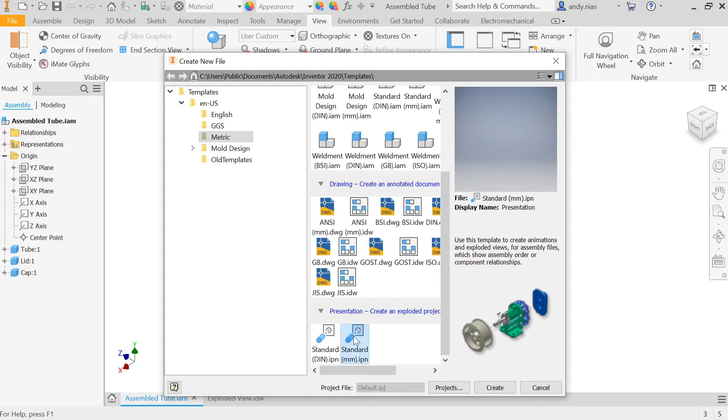So the way we do that in Inventor is we have to create a new file, and it's right down the bottom, it's called a presentation. So you can select that and make sure you select the standard millimeter one. And into there we've got to insert our part, or the object that we're actually going to be working on.

So if you navigate to wherever it is that you've got your parts saved, bear with me one second. Okay, there we go.

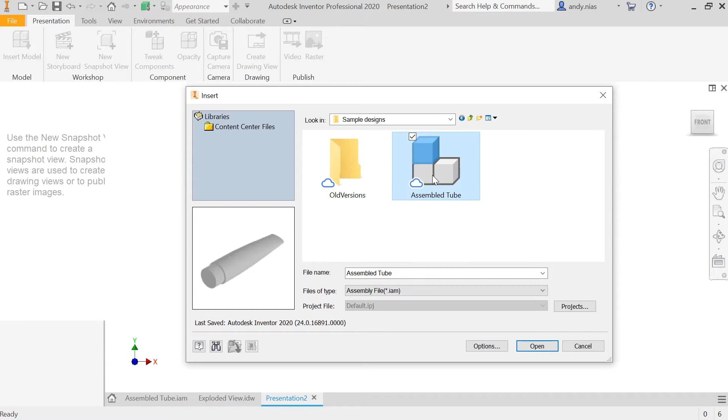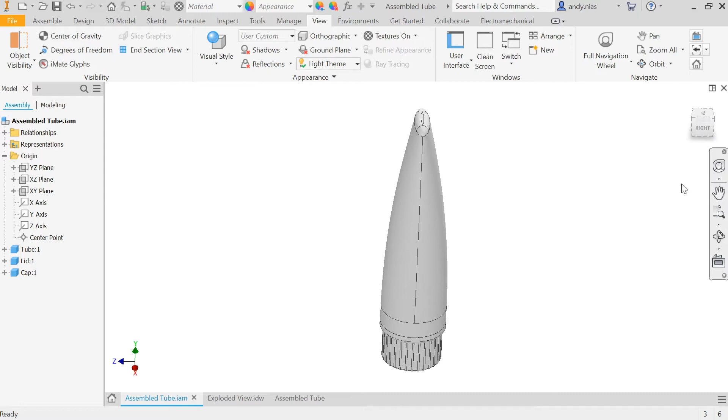It's going to drop that in, and we've got the space. Now just think for a minute on this. Make sure that your orientation of your model in your assembly is the right way up. So I want my model so that it sits on its lid, so the top is facing up and the bottom lid is on the ground. That's the way it appears in your presentation. So think about how you're arranging your part and your model in the space.

Once you've got it in, it's very simple to move the components about. It's called tweak - we're going to tweak components. I'm going to leave the lid at the bottom, and I'm going to move the other two components.

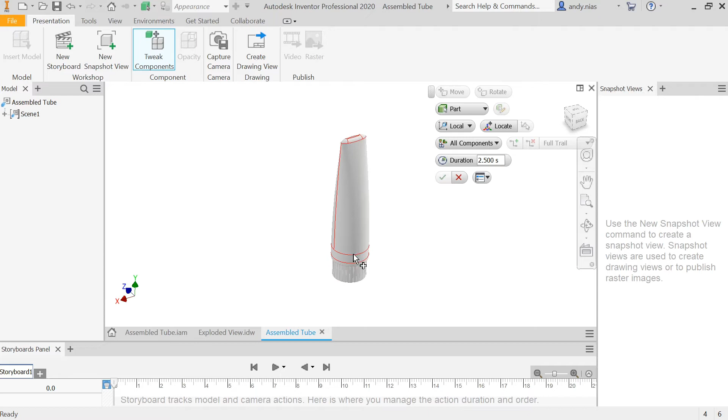So if I just select one, you get a blue line. You can hold shift to select more than one. So I'm going to move both these together, going up. If I just drag them in that direction, they become about 50. I think I'm going to go for... let me change my view slightly. So you can either just drag it or you can put numbers in, and then you can press enter.

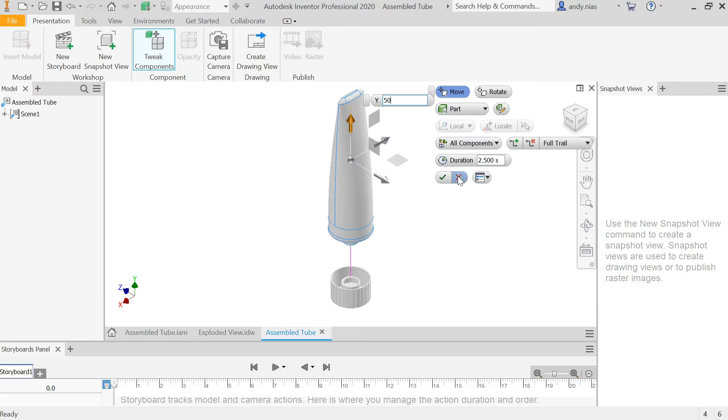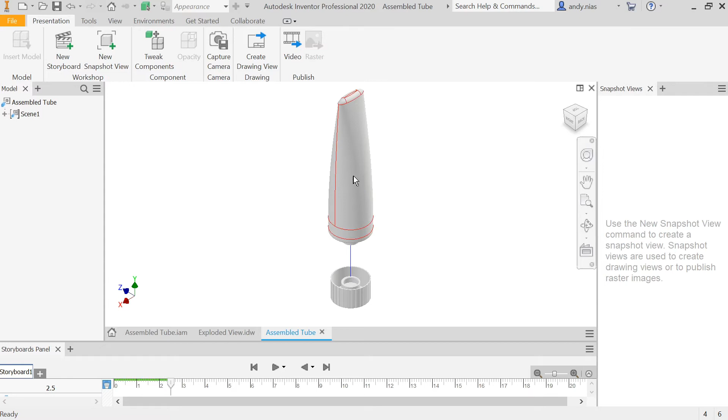When you explode parts, you want to explode them along sensible lines. So obviously this one is all just going to pop along one axis in a straight line. If you've got other bits that fit on, maybe bolts or other parts, think about the direction that they would explode in, and when they would explode - it may be that you need to lift some parts up altogether before this one comes sideways.

So I'm going to move my next one as well. I'm just going to select that one, and move them up - but equally you can move them in other directions depending on how your parts are exploding, so just think about how you're going to do that. I just need to go back to where I was. Tweak that one up 50 again.

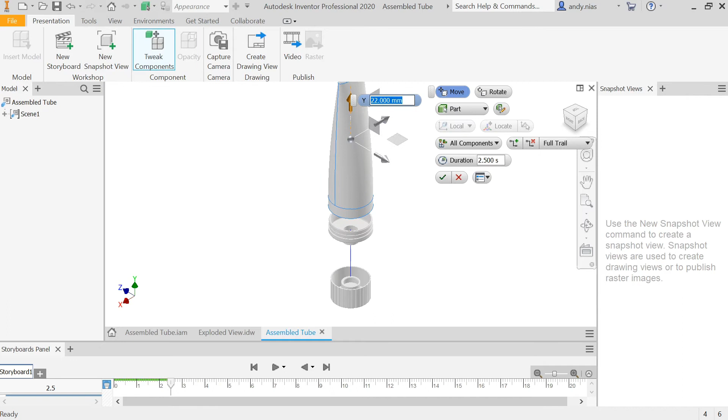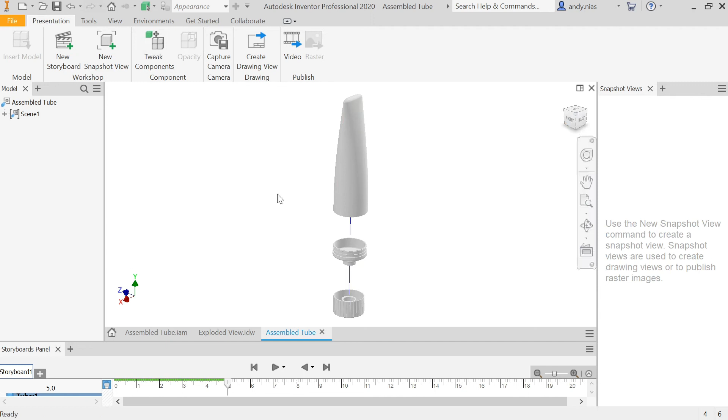Now, any rule when it comes to exploded views is that the parts must not overlap. So make sure, if you're doing an isometric view like this one, when you view it from the corner there's no overlapping parts. If you're viewing it maybe more like this, I think that looks fine, but actually when you come back to view it in your drawing, it's going to be overlapping, and that's not good. If you need to edit them, you can.

I'm just trying to remember how - here we go, tweaks. So we've got tweaks there, so I could change that one to 40, and it's going to move it closer if you prefer the look of that. So once you're happy, you can save it. I'm just going to save it there. I did one earlier, that's fine, write over that one, not a problem.

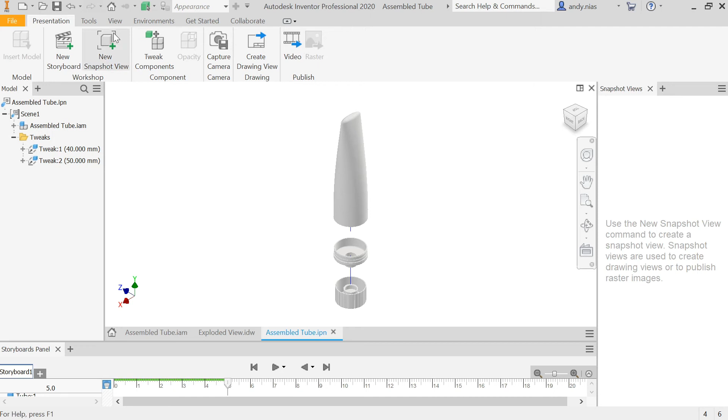Now before we can put it into the drawing, we need something called a snapshot view, which you can create just by hitting that. You can also create it when you go into your drawing. If we go to create the drawing as before, you hit base and then go and find the presentation file that you're going to work on. Now I've already created a snapshot view, so it's appeared. If you haven't, it'll ask you at this stage if you want to do it.

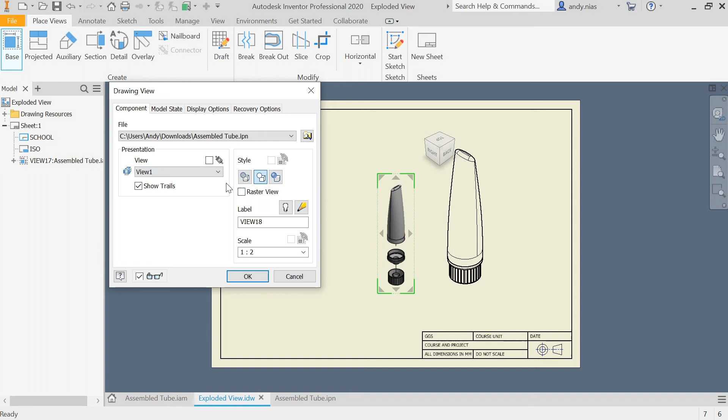So that is what I want. I'm going to maybe make it a wee bit bigger, and then I can drag it and drop it into my drawing. So there I've got an exploded view. One thing, you get these little tails, which I don't think are particularly attractive. If you right click on the drawing, you can actually tick that and hide those tails all in one go, so it's now just showing you that view.

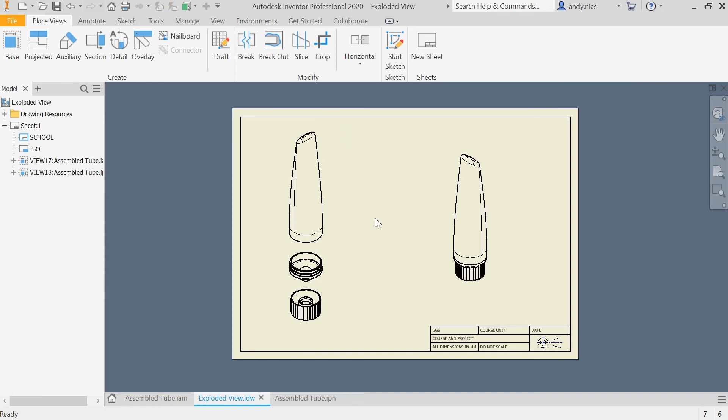If you wanted to change the orientation of it, let's say I wanted to see it inside the other way, then you can create another snapshot view, which is now view 2. If I go to here, I could insert that and select the other one from the list here. So I've now got it the other way up.

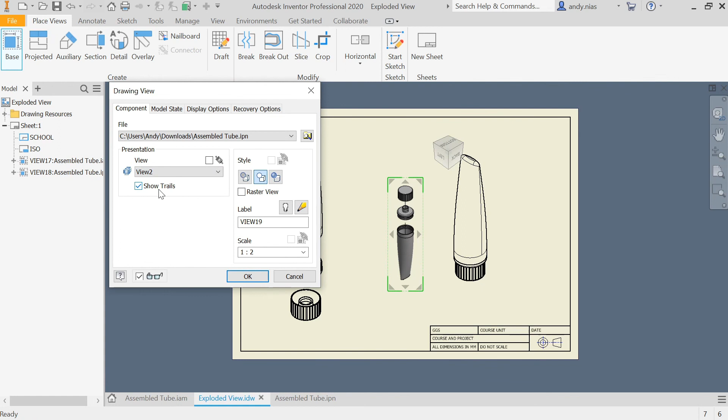So there's lots that you can do when it comes to displaying these exploded views. I'm going to hide my trails again, and if I wanted to, you could make that into a shaded view, add some colour to it, or whatever you want. So when you come to do your wall display, you will need to create an exploded view, and hopefully that video will help you to do it.